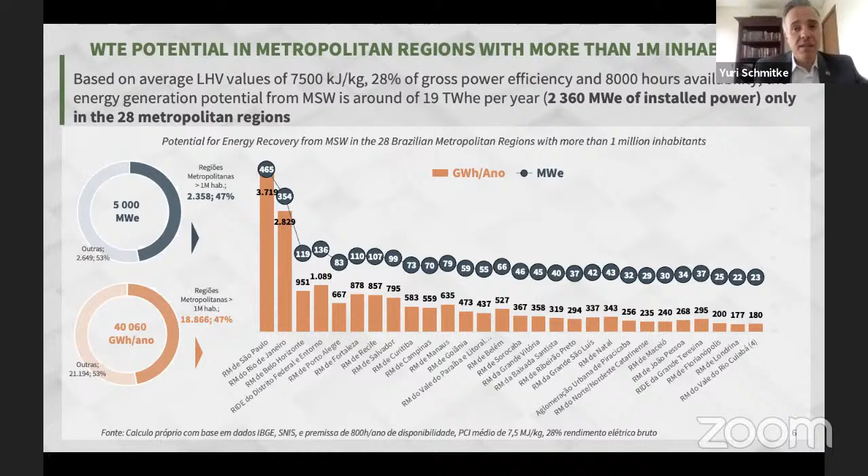If you consider the cities with more than 1 million inhabitants, the potential of waste-to-energy plants is around 19 terawatt-hours of electricity per year, that's 2,360 megawatts of installed power, only in the 28 metropolitan regions. If you consider the 600K inhabitants cities, you have this opportunity: 11.75 terawatt-hours per year.

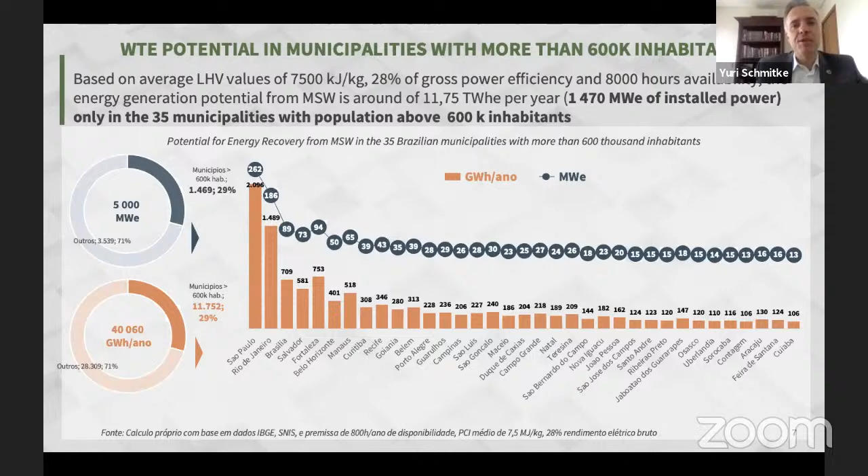And the summary is this: we can construct in Brazil about 118 waste-to-energy plants with 20 megawatts of electricity in 28 metropolitan regions with 1 million inhabitants, and 73 waste-to-energy plants in the 25 municipalities with more than 600K inhabitants.

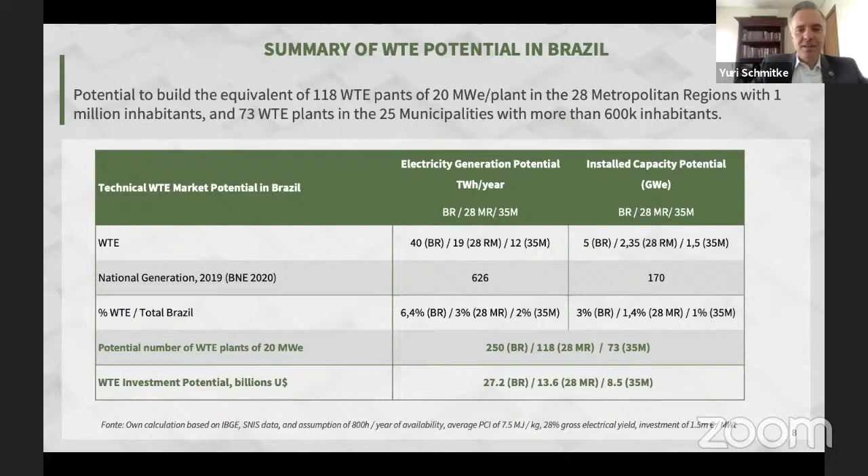Market drivers and challenges: the next step is the new framework for sanitation. As the ambassador said, this is obliging all municipalities to formalize public-private partnerships, PPPs, contracts for 30 years of concession. In the past, and nowadays, we have a lot of 5-year contracts. That's the reality in Brazil.

What can you invest in a 5-year contract? We don't have time to give the guarantees to the bank to have financing for good technologies, just a medium quality of landfills. Maybe you can have that with a 5-year contract, but with 30 years you can have good landfills when necessary. We can have waste-to-energy plants, recycling plants, refuse-derived fuel plants to produce for cement, and have this huge opportunity in Brazil with this new sanitary law that you obey.

If the municipality didn't make a PPP, it will be a crime in Brazil. And you have the chance to bid to have the guarantee with the water bill. I have a tariff inside the water bill, the gate fee, the price to treat the waste. And with that, we have a guarantee to give to the bank to have project finance.

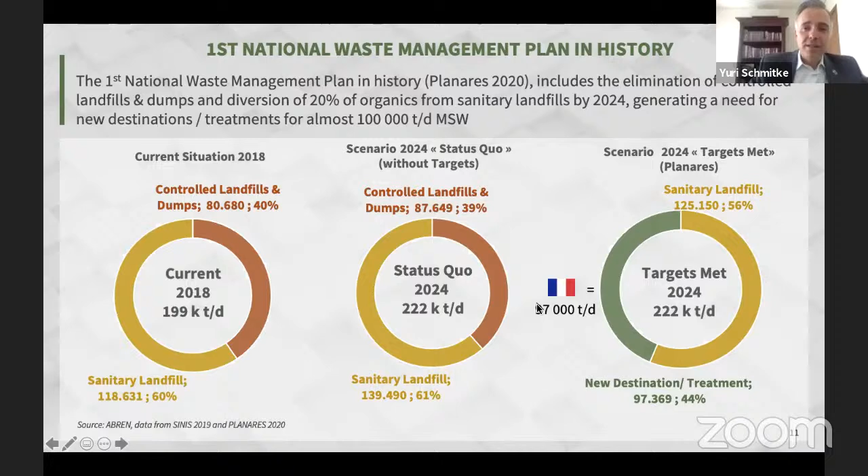And you have a huge opportunity for waste-to-energy in this plan. The Supreme Court banned the construction or extension of landfills in environmentally protected areas, resulting in the search for alternative treatments for 37,000 tons per day of municipal solid waste due to lack of new available areas.

That's in the news. Say the name of the cities: 12 of 28 landfills across 11 states, capitals located in protected areas. And the Supreme Court is now deciding if this new decision will force these landfills to stop operation, or only apply to the next landfill.

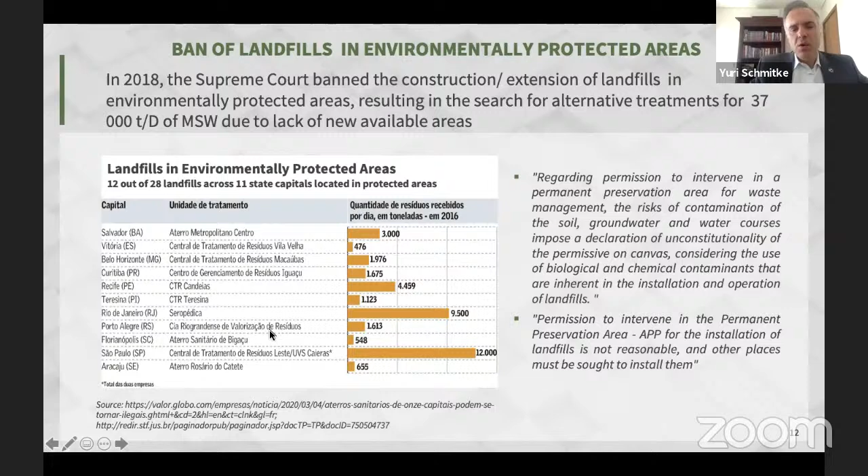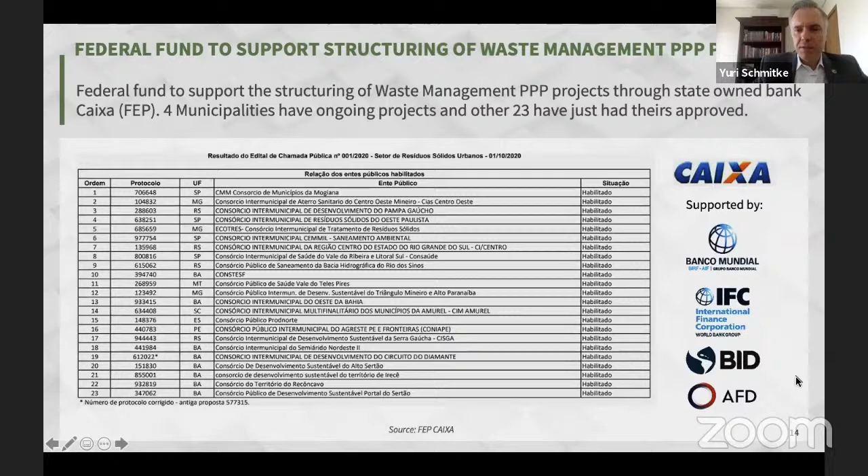Yuri, if I may interrupt you quickly, I think you're having a small problem with your audio. Please take care with your sound. Sorry to our audience also. Let's do one more test, please. Is it okay now? No, your voice is getting very distant. Sorry, I need to interrupt you, I think you're covering the microphone with your hand, maybe you're not noticing it. Can you try once again? Say 1, 2, 3.

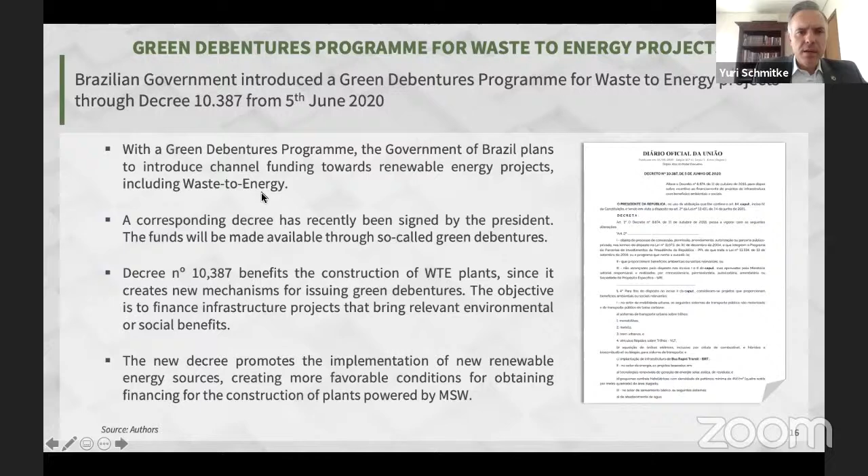I will be so fast. We have green debentures for the waste management plants also this year to the financial sector, and this is a historic low level of our inflation rates. Reduction of corporate tax at 34%. The project of law in our Congress aims to reduce that rate to 20 or 25%, and we have average import duties reducing for machine equipment to 0% rate, if you don't have the nationality for this machine or equipment.

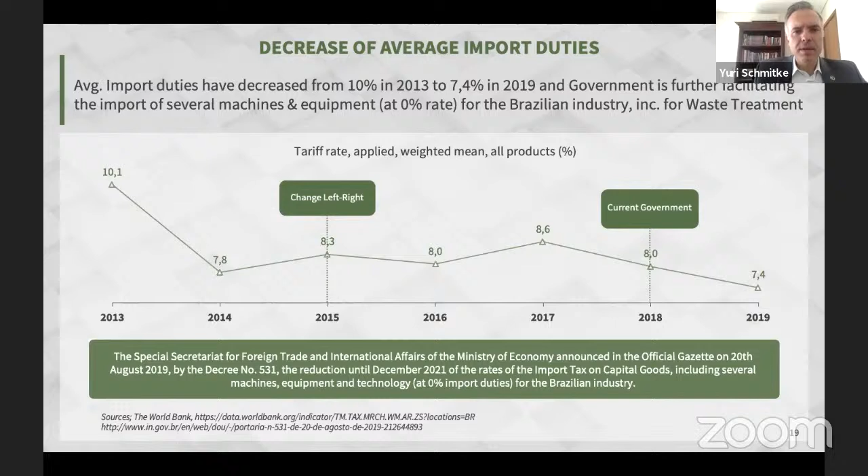And the good news: the Ministry of Energy and Mines is preparing an auction for waste to energy projects in 2021, and ABREN is contributing with the ministry to define appropriate power tariff levels to allow those waste to energy projects. As for market opportunities, we have 6 projects of waste to energy plants: 5 are incineration, and Diadema is gasification, of Outotec.

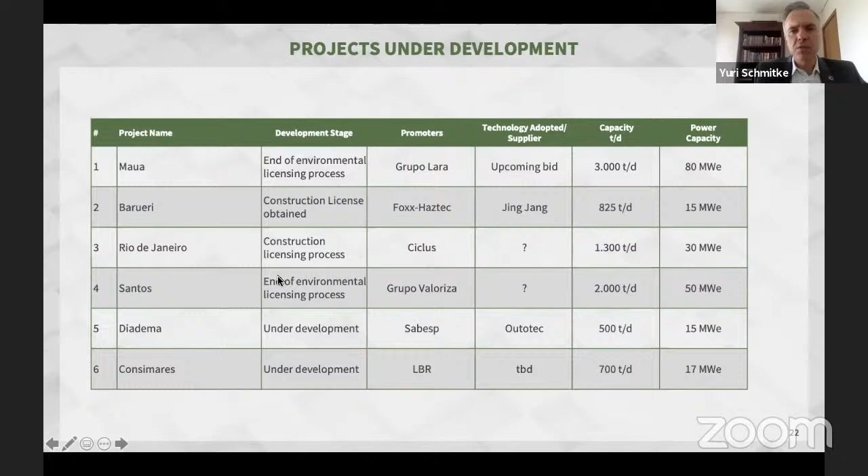And what ABREN is doing: we have a contribution to Planares, an MBA, the first waste treatment course in Brazil. We are developing a national guide of waste to energy. We made 40 webinars in 2020 this year, and we have a lot of publications in newspapers and magazines, every 2 weeks, large newspapers talking about the waste to energy market. Thank you very much.

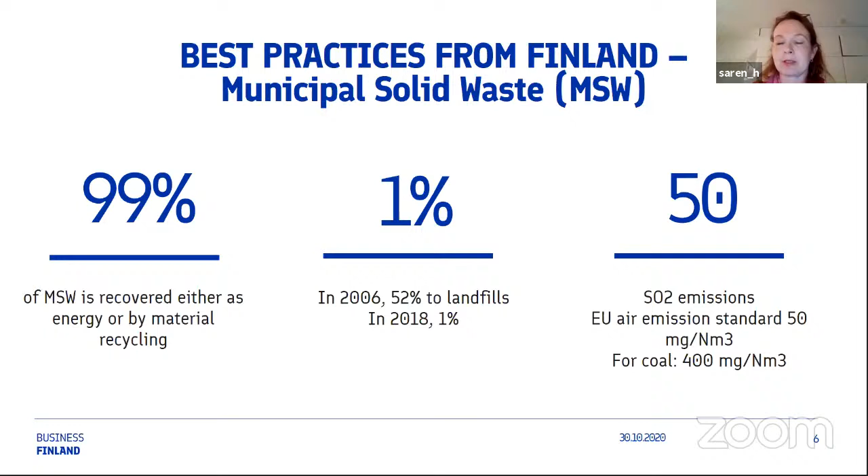What is the local situation in Brazil? Are we talking about new landfills, how to build them in an environmental way? Or are we talking about how to utilize the waste already there in the old landfills, and taking care of the old landfills, what to do with them? Are we talking about centralized solutions, or decentralized solutions?

We had a very interesting seminar the other week with Frost & Sullivan, a global player who provides market information and market reviews, and they called the 2020s the decade of decentralization. I think that's a very important, interesting development. We have to dig more into details about what it means in the end for the energy companies, for the consumers, for the utilities, and so forth.

Again, from this holistic point of view, understanding the picture, how much renewables you have, what is the case of the various bio raw materials, whether we're talking about forest, agro, or the industrial side and waste streams. Also in the picture we have wastewater and sludge, what to do with electronic waste, hazardous waste, construction waste, and very important nowadays is also the plastic issue, meaning river and ocean plastics, what to do with that.

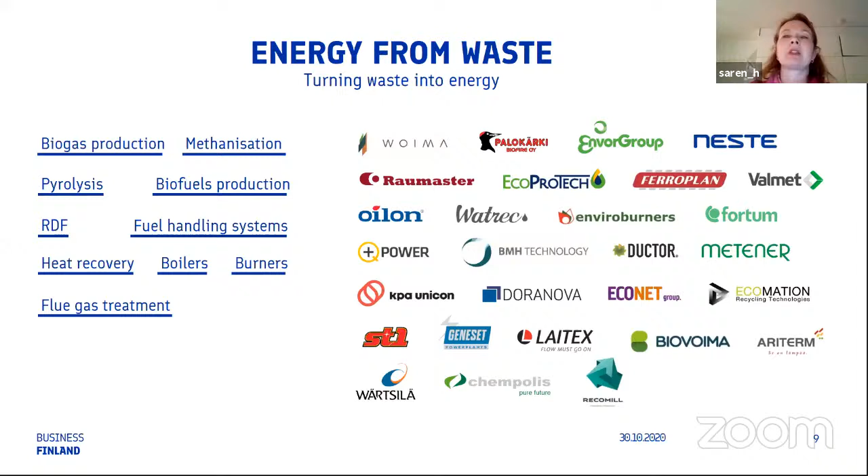Then going further to energy from waste, also companies related to that, heat recovery, flue gas treatments - these issues become more and more important as we need to be more sustainable and use all the materials we have at hand and recycle those. Last but not least, different kinds of services available, whether planning, research, or operating systems we have at hand.

At this stage I'd like to end my presentation, and hopefully there were some ideas, some food for thought, and we can discuss certain issues later. For instance, the smart and flexible grid, which isn't today's topic, but the grid is definitely needed in the end to provide electricity to end consumers and end clients. Thank you for your time and your interest, and I look forward to listening to the rest of the presentations and further discussions with the Brazilian counterparts. Thank you.

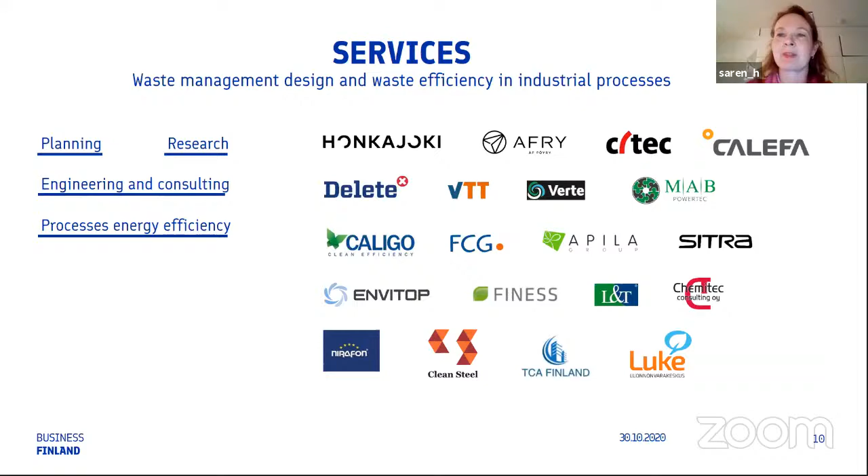Okay, thank you very much, Mrs. Sarén, it was a beautiful presentation. We're very excited to see great news regarding our climate change goals. We always see so much bad news, and it's great to see Finland with such a great 2035 goal of being carbon neutral through Finland's technologies, something we hope the rest of the world can achieve, and you can support that too.

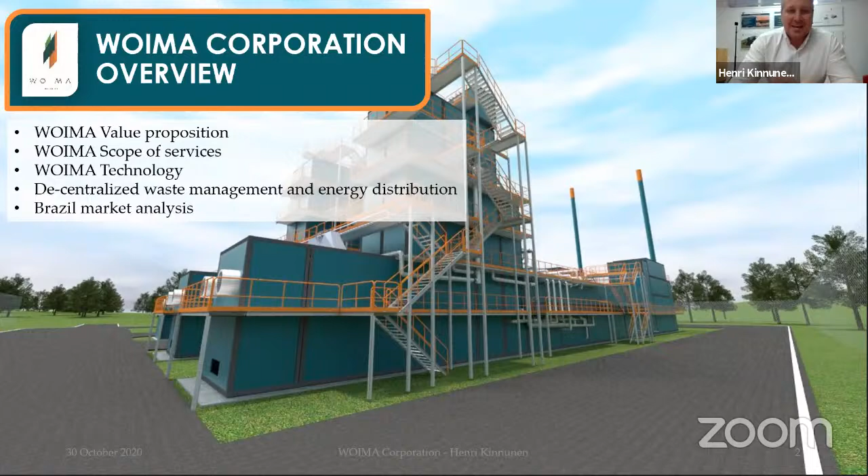My company is focusing on circular economy very much. What we want to do is significantly reduce waste landfilling, as is being done in Finland. With our solutions, we can provide several energy commodities. We can treat any type of waste, and we are strong boosters of recycling, as opposed to mass burning. So we want to add value to any type of waste, and through this decentralized model our aim is to cut down the logistics cost heavily.

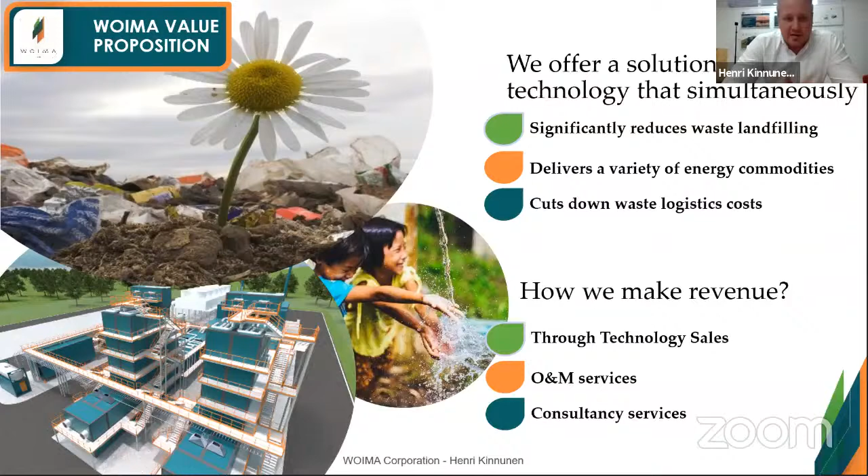We are an operator and a supplier of best-in-class circular economy solutions. Our main product is the one you see here in the picture, called WOIMA, a modular, prefabricated, standardized waste-to-energy power plant. So we are a technology sales company. We can also offer services to run such a plant, and many times we also provide services to our customers during the feasibility stage, so we do a little bit of consultancy service. But our main focus is that we want to sell these plants everywhere, and I will explain the difference compared to the many other companies we compete against.

Maybe this slide presents quite well what we are doing. We are very flexible, so we can be the full EPC company if there is a need from the customer, but many times we want to operate with the local company - that's why I mention civil versus utility connections, since it's often better that local companies handle that. Where we put most effort is what we call WOIMA technology EPC, where we deliver the whole plant, do the installation, ramp up, and then we can even run the plant on behalf of the customer. So it's a kind of full-service house.

I have some better slides about the ecosystem, and I think it's very much valid in the Brazilian context. We can also offer the full kind of solution, so this kind of pre-treatment facility we can also offer.

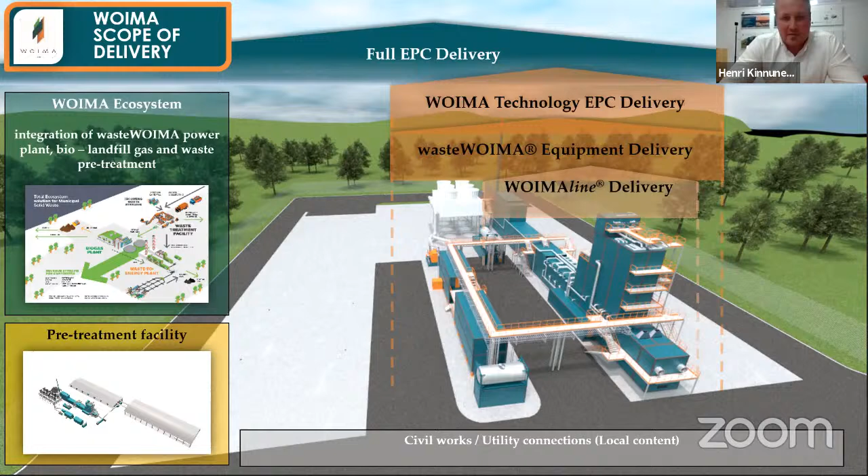The customer only needs to decide what they want to do with the steam. So 400 degrees, 40 bar comes from the line, and then it's up to the customer to decide if it's district heating, high pressure steam, a combination, and so forth. As I mentioned, we meet the local emission standards, even the strictest ones we have here in Finland. We collect the so-called APC ash and toxic ash, about 1 to 3%. So we promise that we can add value to more than 95% of the waste that comes into the plant, which is quite good.

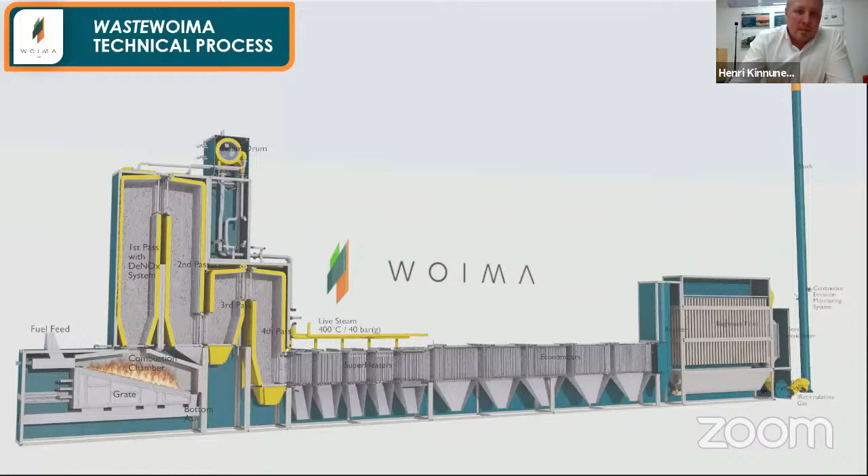Any type of waste, typically municipal solid waste. It can be already landfilled municipal solid waste as well, industrial waste, construction waste, even hazardous waste to some extent, biomedical waste. And what we receive a lot nowadays is this kind of ocean and river plastic waste, which is a good fuel for our plant.

Typical customers for us are waste management companies, companies who have access to waste for a long period of time, like Yuri mentioned, 5 to 20 years, because it's a must in this business. We work with energy companies who are interested in waste to energy and want to expand their plants. We work with private investors, developers, and renewable energy funds, because our concept is a standardized solution, which gives certain benefits for having multiple plants in such funds.

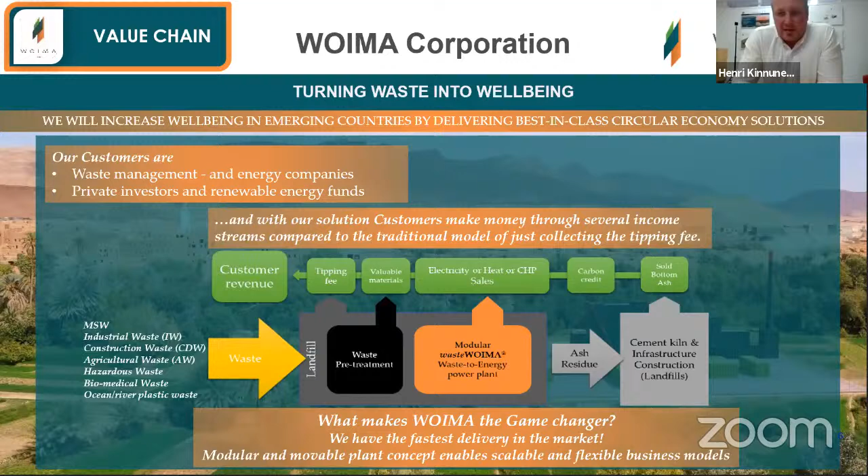This is the typical customer revenue stream. The customer gets money through the gate, the so-called tipping fee, and if there is waste pre-sorting, we boost that as much as possible, so we would at least do recycling for the metals and the glass. Then comes our plant, so it's either electricity or heat or a combination of those. And many times there are also carbon credits, if the customer can get those - I don't know if that's the case in Brazil. Then also the bottom ash is typically sold or given to cement kilns, or in many countries they make bricks out of that.

Some words about the wasteWOIMA concept. It's 100% scalable - in this picture you see 2 WOIMA lines. You can start with one if your waste amount is increasing, and then bring another line later. This is the leading idea of the whole system, so it's easy to scale. What we promise is 15 months from signing the contract, you have the plant up and running in your backyard.

What is very different from many competitors is that you can actually relocate the plant, which gives certain business prospects. You can have an existing landfill, bring the WOIMA plant next to it, start mining, and after 5 to 10 years, depending on how big the landfill is, you relocate the plant. This also gives you certain security if your customer is not paying the bill - let's say they don't pay for the electricity or the waste, so you can actually move the plant after that.

We don't aim for the big plants, so we are the small to medium scale power plants, which I'll show you later in terms of size. We do accept almost all wastes as fuels to our plant. I think in Brazil you have a big country, but in many of these big cities you don't have too much space. So the smallest plant we have can fit into 3,500 square meters, which is pretty good, and it can be next to an existing landfill already.

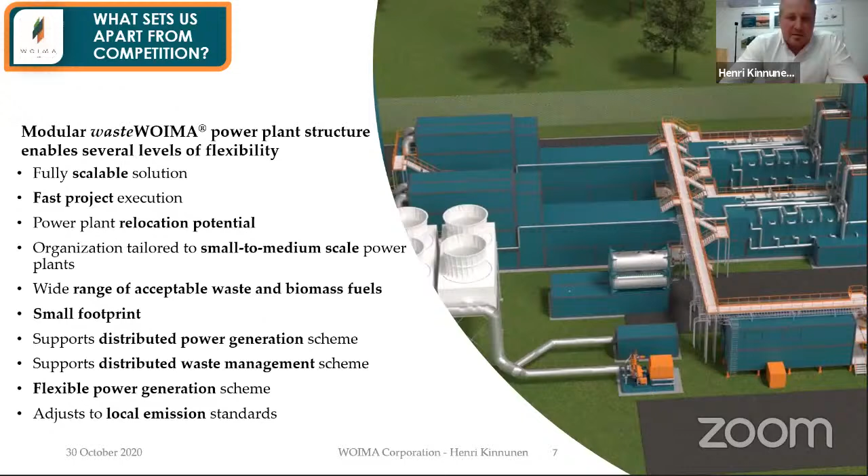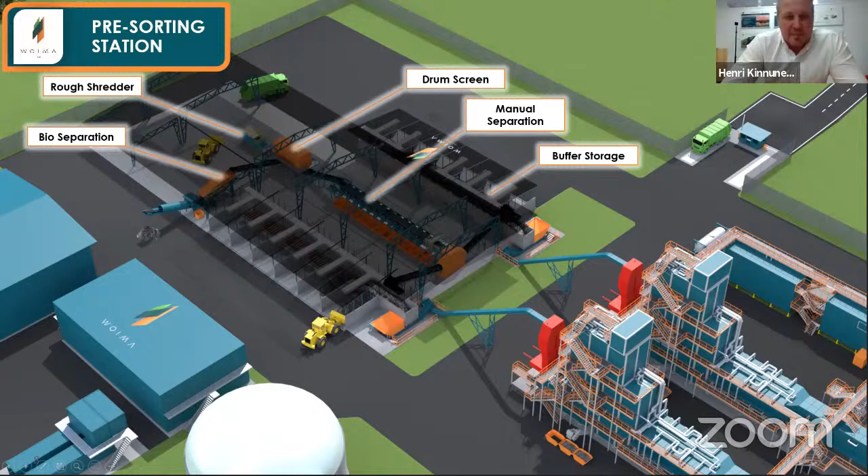As I mentioned, we can also provide this pre-sorting station. We have many good Finnish companies like Metso, for example - there can be a Metso shredder here and a simple manual separation line. Then we are boosting this kind of recycling method, circular economy, as much as possible, because we do accept almost any type of waste. So we know what type of fuel is coming to us, and we can also integrate this into our system.

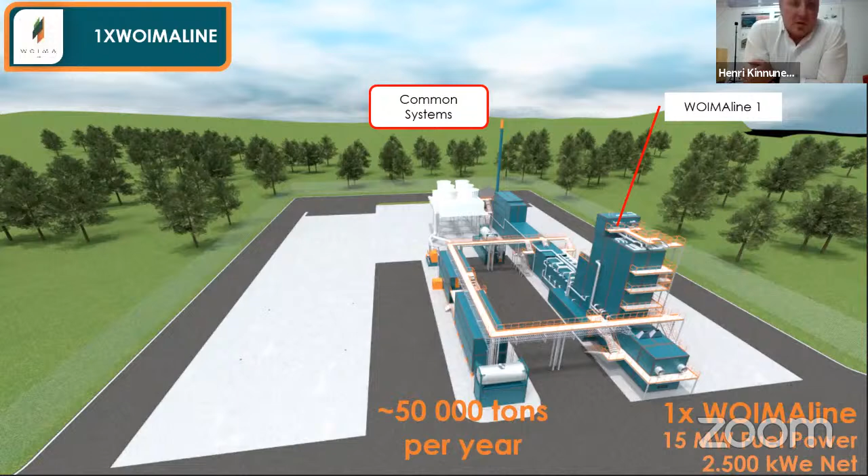A little bit more detail about the scope of what we do. Here you see one WOIMA line solution, around 50,000 tons per year, 15 megawatt fuel power per line, 2.5 to 2.7 net electricity to the grid. If you start with one line, you can add another line later and it will be 100% the same - you can run different fuels, or you can run the same fuels with 2 lines.

So this is something that separates us from many others - we are selling the same product in every single market where we are present.

Then I mentioned a bit about the ecosystem. What customers really want is an ultimate solution, someone who will give them the total solution. So that was the reason why we started to develop this WOIMA ecosystem.

It can be an existing landfill or a greenfield, and there's a waste treatment facility. In many countries, the waste coming into these landfills can be quite bad quality and varies a lot. For example, in Brazil, during the rainy season the humidity of the waste can be pretty high. With this method, we separate organics, either into a composting plant or a biogas plant, so we know the waste that comes to our plant will be good quality. This is how we secure the waste and reduce the seasonal variation as well.

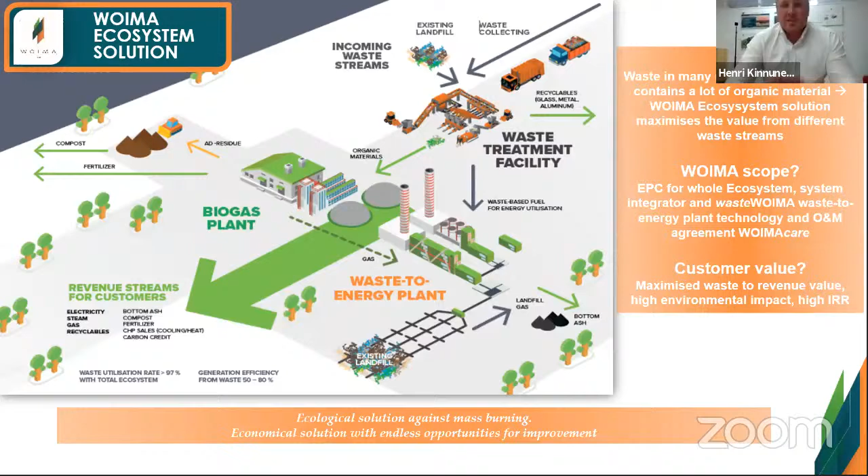What we've developed a lot is that we can also take the landfill gas and the biogas directly into our system, so we can increase the amount of electricity from such a plant. This is something we can also offer. Here you see a better picture of that. The smallest plant of this WOIMA ecosystem starts from 250 tons per day, but we can upscale this easily up to 2,000 tons per day, so there we start to be already in the bigger scale of plant.

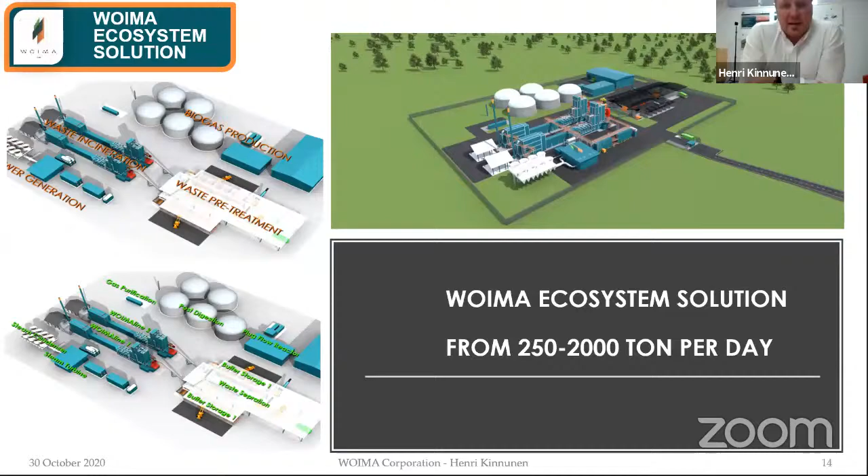Then I promised to give you a little information about decentralized waste management and energy distribution. We did a nice study for the city of Nairobi roughly a year ago, comparing a centralized big waste-to-energy plant versus having several smaller plants in the city of Nairobi, and the results were quite astonishing. Many of these results I'm sharing here are based on real facts. Such a study is comparable quite nicely to almost any big city like Rio or Sao Paulo.

By having this kind of decentralized waste management facilities close to the waste, the waste management or waste logistics costs are reduced up to 50%. I have in the next slide some actual figures from Nairobi as well. The electricity transmission losses diminish up to 10% because end users are close. You can do private PPAs, you can have mini grids, and this promotes quite well new opportunities like having batteries, etc. So it's endless opportunities for optimization.

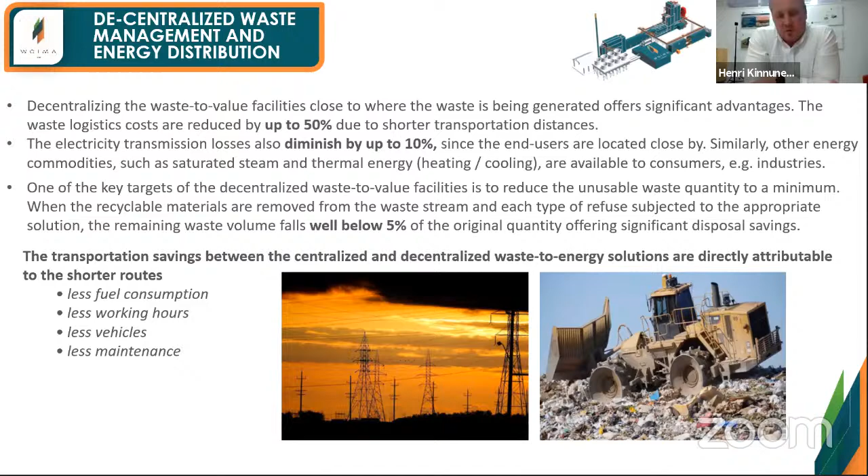The transport savings between centralized and decentralized waste-to-energy solutions come from the shorter routes. The end result is less fuel consumption, you can have fewer trucks, less working hours, and less maintenance. So there are direct savings for the municipality or whoever company is doing the waste collection.

It's not only a financially sound solution—as we say in Finland, we want to boost this circular economy as much as possible. There are other tangible and intangible benefits too, like increased recycling, higher waste collection, more flexibility in waste collection and transportation. We are reducing water, land, and air pollution as much as possible, and also there are positive health implications. So we are boosting this kind of smaller, cost-efficient waste energy facility like the Woima plant.

This can also be tested at a smaller scale. What the customer doesn't need to do is invest in a heavy 100 million euro plant. They can start with a smaller plant, and then when they see that the concept is working, we increase the size. So it's very efficient, very flexible.

The Woima plant has a very small footprint, a modular structure, and a very high level of prefabrication, as every single module comes in a 20 to 40 foot container size. So in practice, we can deliver these plants, for example in Brazil, anywhere you want, from the nearest port to the site. Because it's already designed, every single plant will be more or less the same, so you will save money on design and engineering.

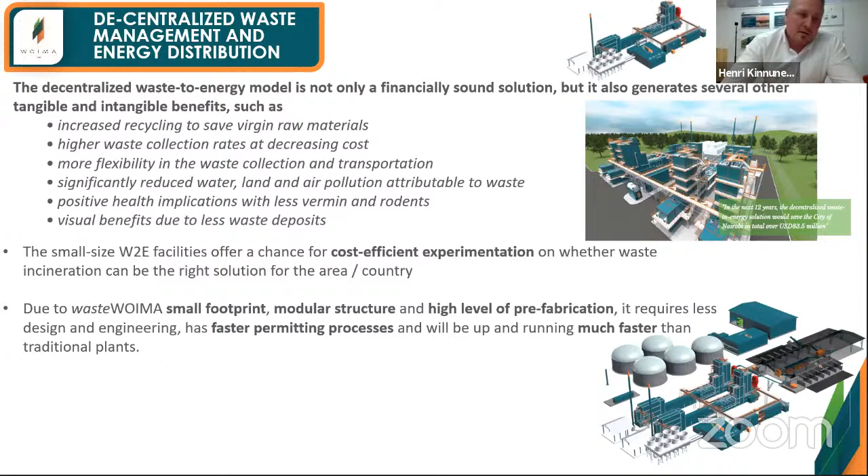Here I mentioned that through that study we did for Nairobi, over a 12 year period they saved more than $83.5 million only for logistics. With this money, they could already buy more or less 4 plants, so the savings are significant. I think this is actually exactly the case for Brazil as well.

Because many of the things that ABREN is now boosting will have a significant impact on how the waste will be treated, what the implications are, and what you need to do for the waste, creating not only health benefits for the country, but many business opportunities.

Our view is that Brazil has a great future not only in the waste-to-energy sector, but in the context of circular economy, because there are a lot of landfills where the existing landfill space can be used, and a lot of waste that can be treated. If you do things right, there will also be green energy to share for everyone.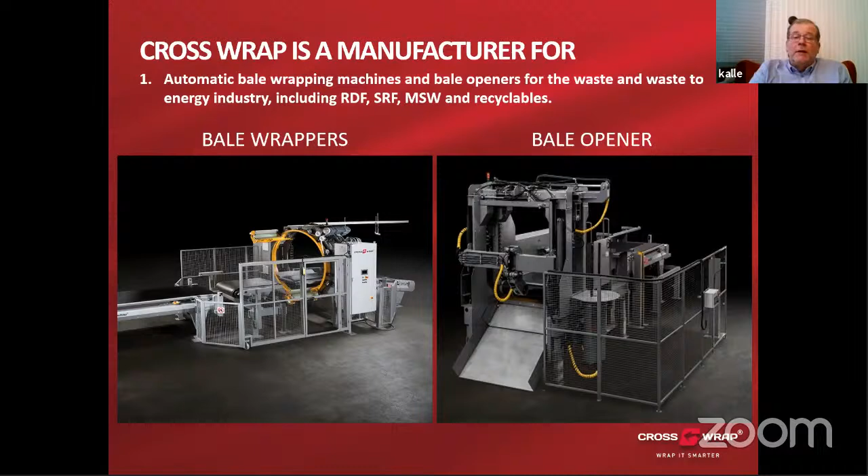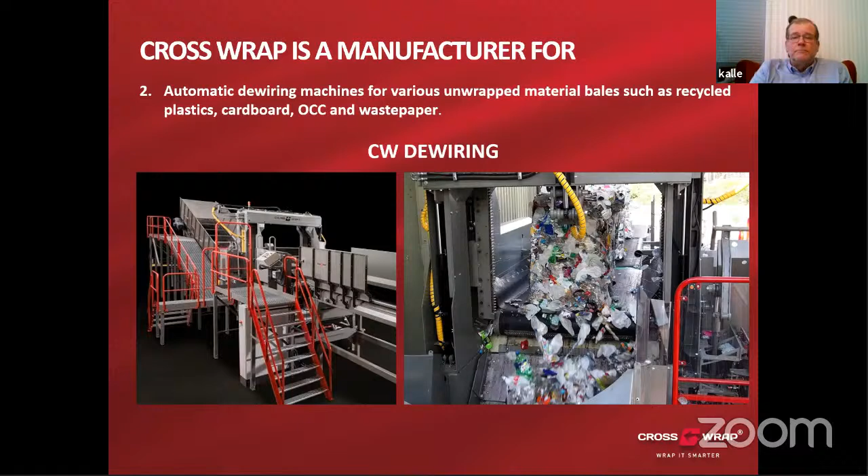So the concept is that whatever the system is in the front—you separate the materials, or it's municipal solid waste—there will be a baler, and then we wrap it, meaning we save the energy from that first step. Whether it's SRF, RDF, or municipal solid waste, it's pressed and wrapped tight, and when it's pressed and wrapped tight, the energy value remains.

So then it's stored, transported, stored short or long time. Long time means dry landfill, and short time means direct by truck to where the energy will be used. On the other end, we have a bale opener so we can open up the bales, and the material follows into the process—we can take the ties and films out if needed, or throw them in, depending on whether you have mass burning, fluidized bed, or a cement kiln.

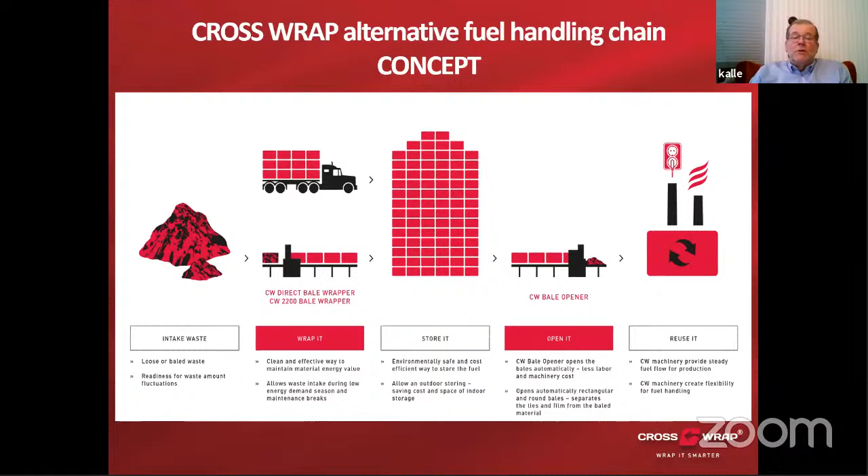About the machinery, we have been in business—I started the company in '94, and in '95 we did the first waste project in Germany. We moved that landfill there, baled and wrapped it, and it was shipped to be used as waste to energy. It was like landfill mining.

Next one is in Brazil, RDF. The material is first sorted—valuables away, organics away—so then it's burnables, which can be landfilled like dry landfill or used for fuel.

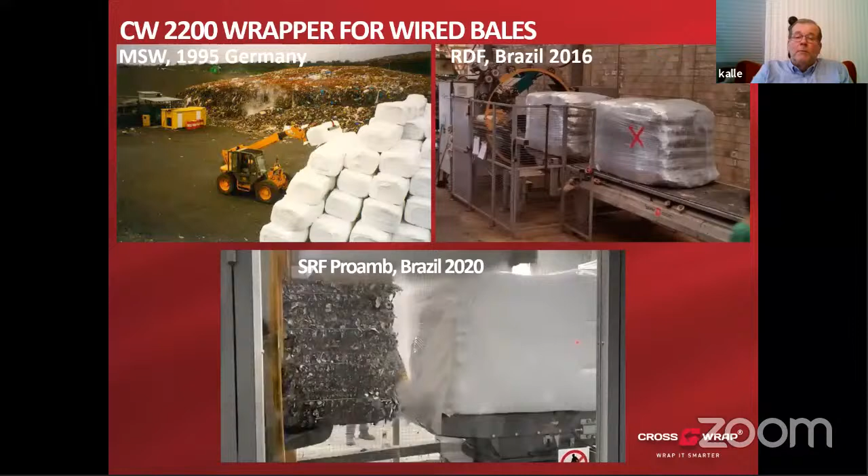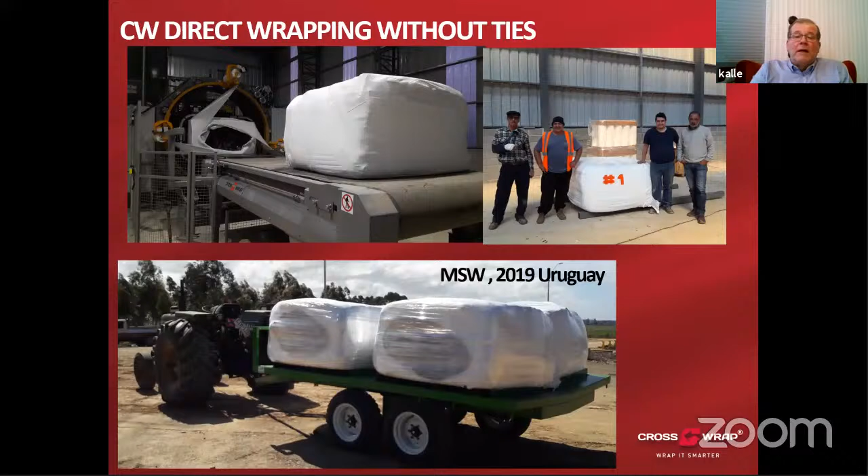The third one here for this CW 2200 wrapper is for Proamb in Brazil. On the left side is SRF, and we're finishing that as wrapped bales. The CW 2200 is a wrapper which works behind the balers, tying the bale first, and then we wrap it. We also have a solution, CW Direct, which wraps after twin ram balers without any ties. This is an example from Uruguay, where they are baling and wrapping municipal solid waste, which goes to landfill as dry landfill and can be used for fuel later on. The whole idea behind both systems is that the energy value remains.

That's about transporting those bales, like in Brazil - I've seen quite many flatbeds for that. This left side picture is from New York, actually Long Island, where they are shipping the material to landfills. Beautiful material to be used for fuel, but the US guys think you can stock that for 100 years or maybe 20 years, but it will be taken for fuel, I'm sure, later on.

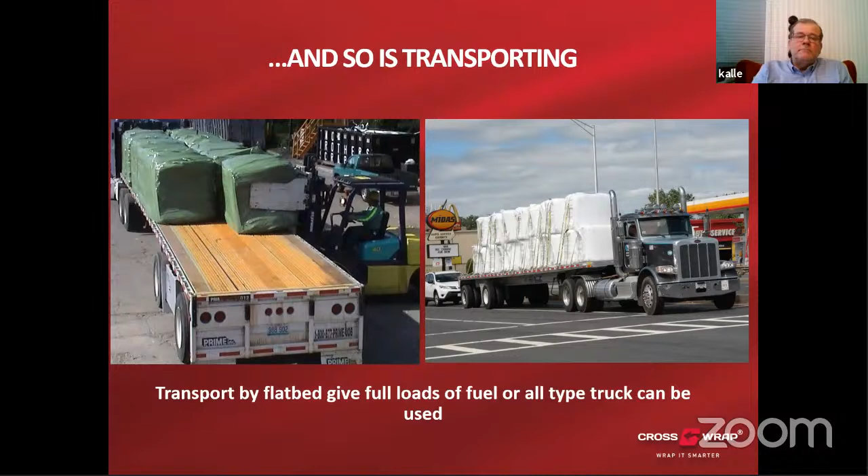I picked up some US examples here - this is New Jersey. These guys have a plant that does about 2,000 tons per day, shipping that to a landfill in the Midwest by rail. They have 100 tons per rail car, no smell, no flies. In their case, they don't care about the energy value, but it remains, and it can be used later on.

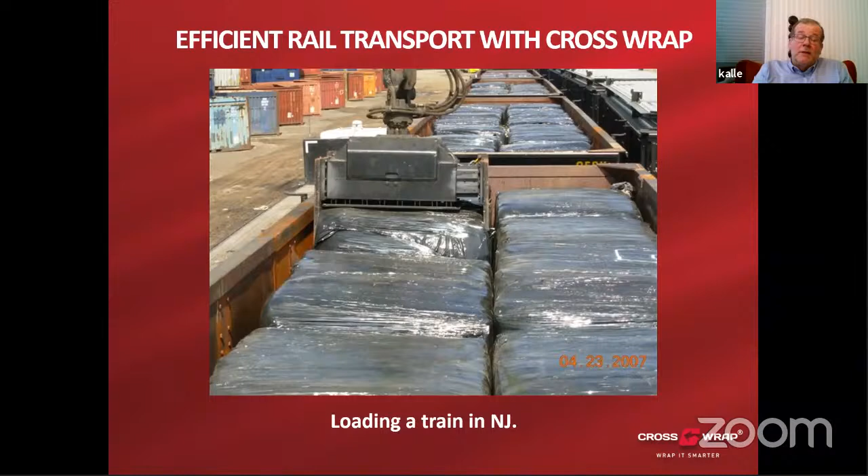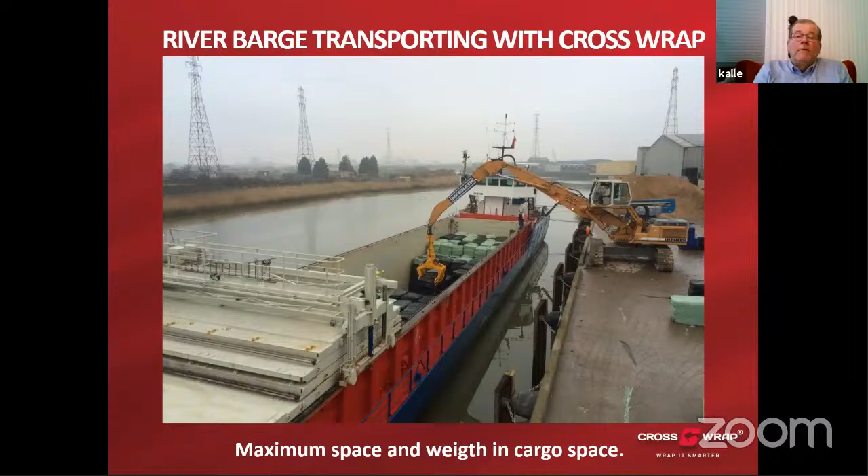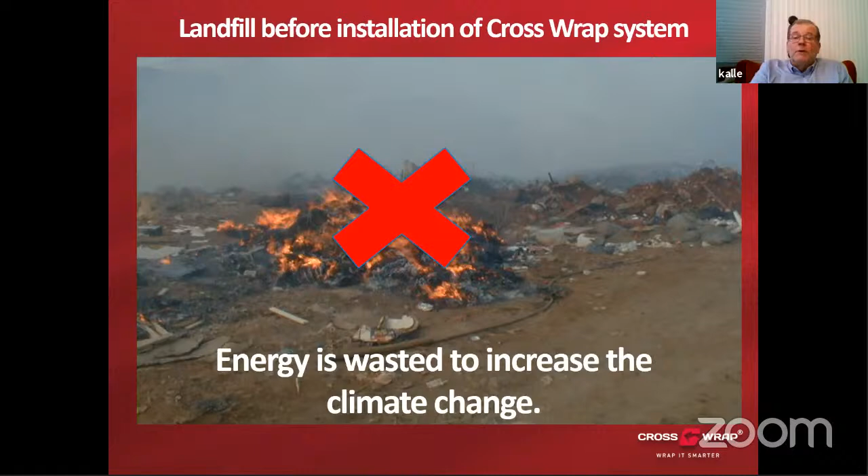So that was the handling, but here's a landfill. This was actually taken by our engineers when they went to install a wrapping machine at this site. This is a typical landfill, unfortunately, even today in many cases - whatever the country, South America or even in the EU, though this was in the 90s - they burn the waste, maybe illegal dumping or even legal dumping, but that's how they get rid of the waste. As it is, it's wasting the energy and increasing climate change, which is a poor thing we don't like, but it happens today.

This is a little bit better, but we still see birds, flies, and flying materials. At the same time you don't see fire, but the energy value doesn't remain in this material, and it's costing these open-top landfills, which are very typical. They still create big problems for us in climate change. This is something we do not recommend, and we've seen more and more of these being closed because of the problems they cause for our Earth.

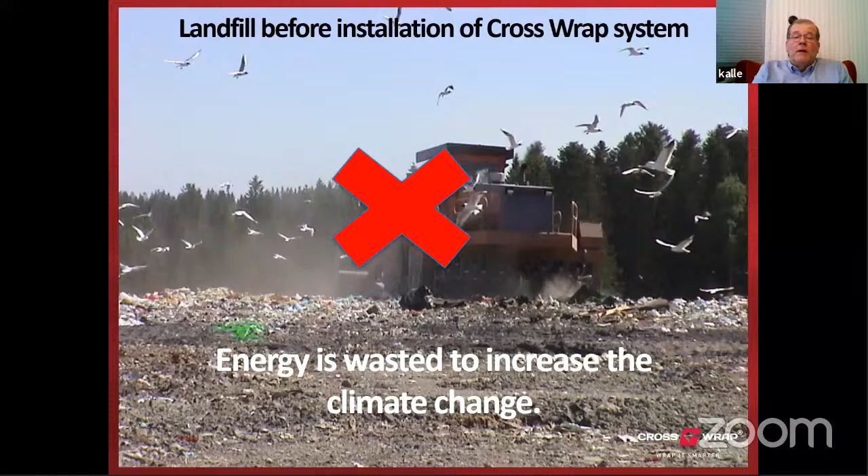This is then a dry landfill where it's easy and nice compacting. You just need a material handler, and then you put the bales in a stack, and then you put a little sand over, and then you can drive again there. But the beauty is that the energy value remains a lot in this case.

And it will be picked up later on for what they call landfill mining, but the material will stay clean. Even though they call this dry landfill, we call it just temporary or long time storage. It's a solution for when it's needed on long time storage, like in Brazil, where they won't have the money to do all the investments for the energy plants in a first step. This is one step forward, and it's a big step for stopping climate change.

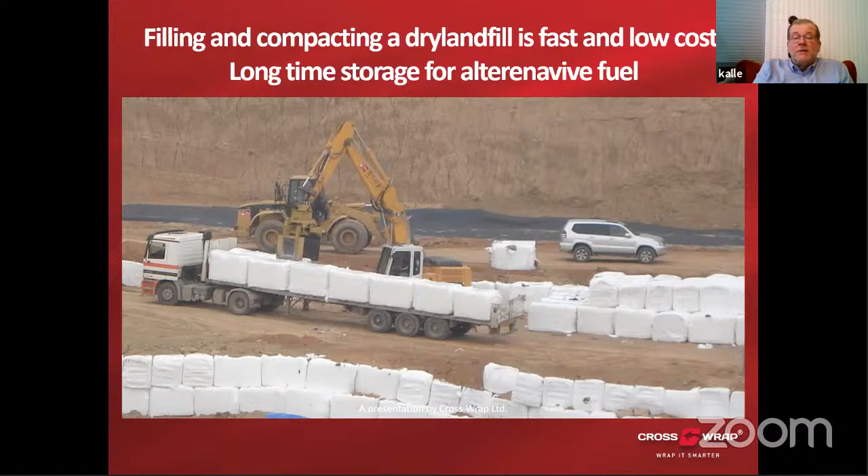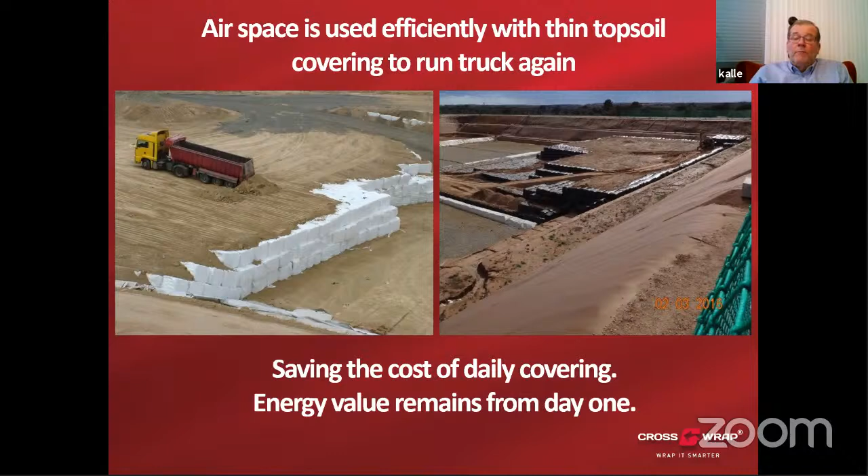This just shows an example, on the left-hand side, in Spain. After they put layers of alternative fuels on the ground, they put a little bit of sand over that and you can drive again. On the right-hand side, it's from France, same thing, and the energy value remains from day one. This is from the transfer station or the waste handling site. From there, the material will remain with the energy value.

Just another picture from the dry landfill. As you can see, there's no birds, there's no flies. And the big deal is that today, for a normal landfill, one of the biggest costs is cleaning up the leachate, if that's done right.

In a dry landfill, you get a lot less leachate. It's basically rainwater, but the rainwater doesn't go through the materials, meaning the leachate is so much cleaner. Cleaning that up is a lot less money, and it makes a big cost savings.

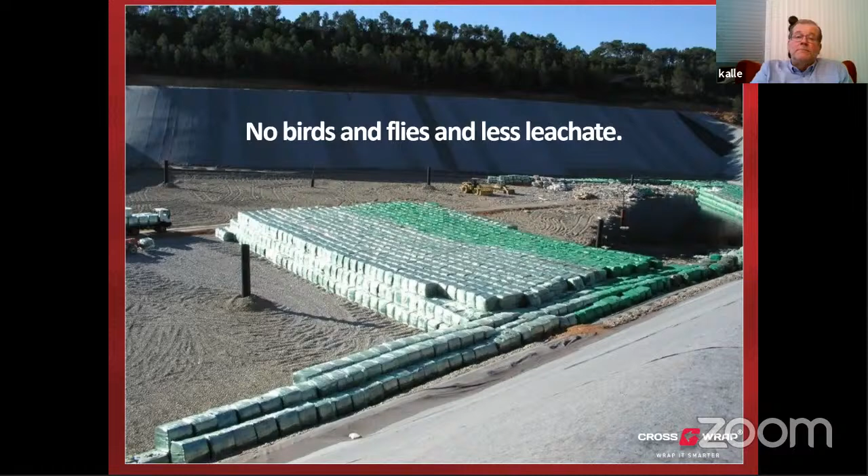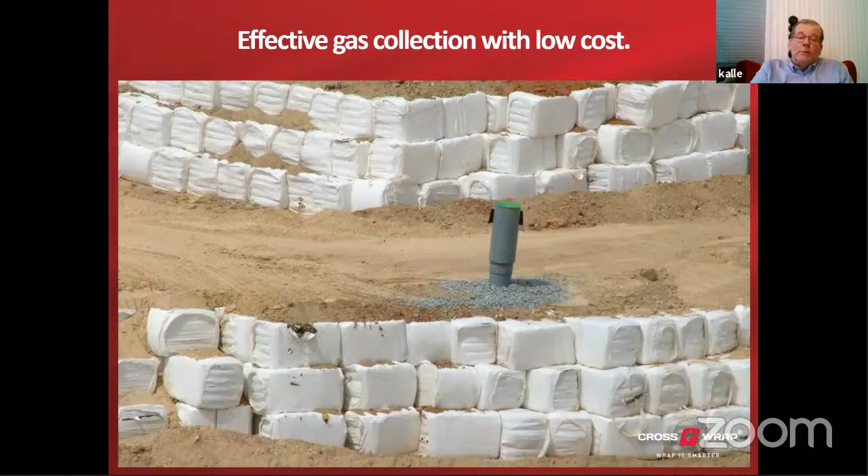This is just showing the tube there for gas collection, there's a little bit of gas coming out, and that can be collected easily, which again is protecting the environment.

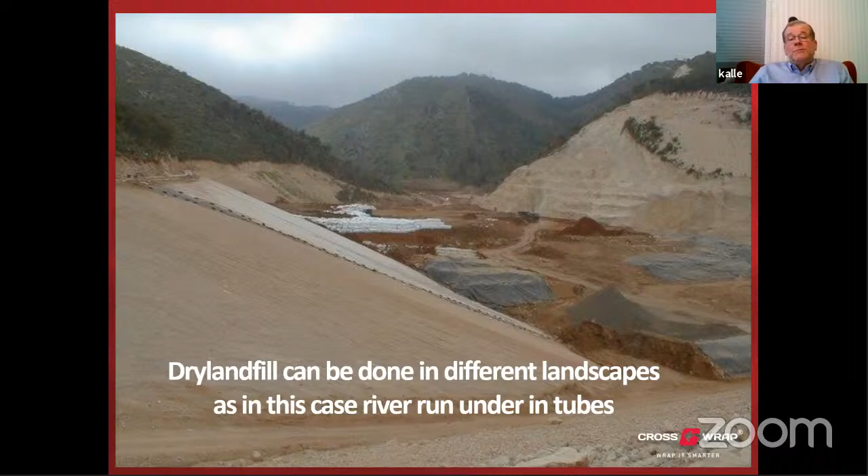So all this is filled up, and there's a river underneath, which is in a tube. Beirut is nearby, but they didn't have any place to make the landfill, and this was the solution. When we started the project, there was one waste-to-energy plant, but the locals burnt it down, and ever since they haven't had waste-to-energy, so this material is just waiting for use later on.

Okay, then we jump to the use of the material. This is an example from Germany where Suez has a plant that has a contract with the locals where they take waste 12 months per year, but at the same time the site is in maintenance once in a while, and then you have peaks where there's more waste than they can handle.

So in the same building, they have baling and wrapping. They have a license to stock that outside. And when they are low on waste, they will use this energy from those bales on the side, meaning they can always run with high performance for the plant.

This is an example from Mexico City, where there's sorting in the city. Actually, it's near an airport, where they have a couple of our wrappers working. And then it's shipped to Cemex to be used for fuel. It's a nice, neat operation. It's just not ending up in a landfill anymore.

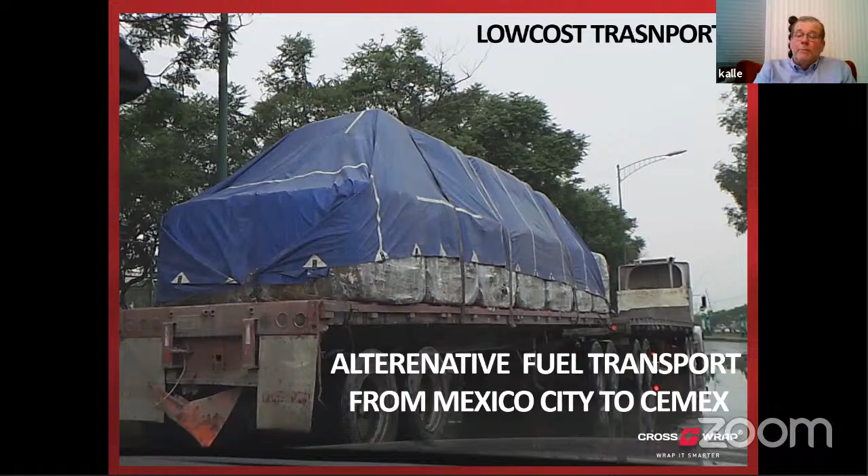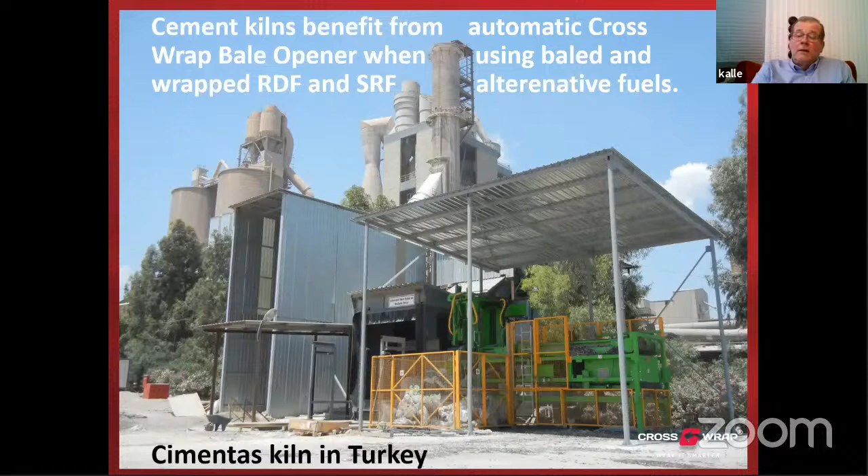This is a project in Turkey, where we have a couple of those wrappers. We have a few wrappers and a couple of dewiring systems, bale openers working for a cement kiln that they can use as fuel. This is the InterCement.

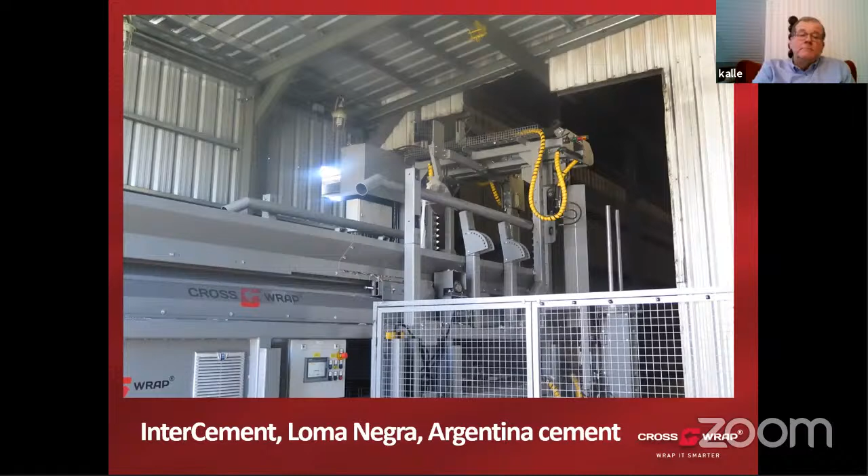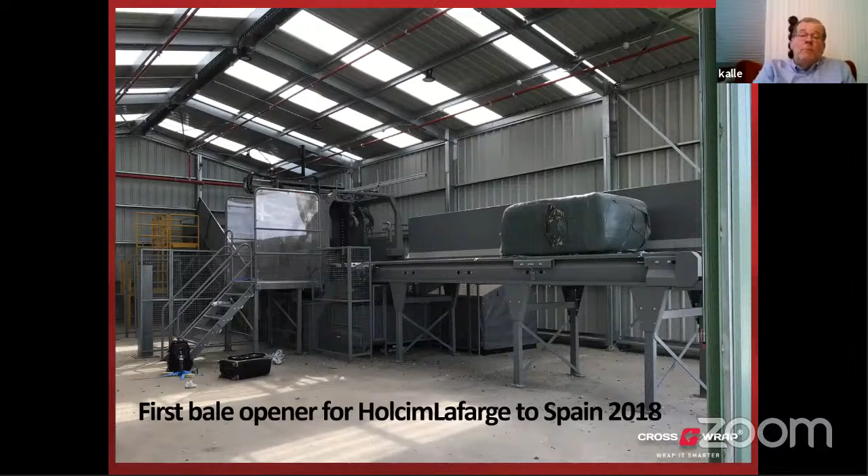Just an example from South America, nearest to Brazil. This is Loma Negra, where they are receiving SRF in wrapped bales. This site is the first bale opener in Spain, and it's Holcim Lafarge, Spain. Why I'm saying first, because they have already ordered the second one for another cement kiln in Spain. They take most of the materials locally, but there's quite a lot coming from like the UK or Ireland.

This is Titan Cement in Greece. On the left-hand side, you see the bale going in, and on the right-hand side, we are pulling the film and ties out. And then it goes to the process to be used as fuel. We did replace another machine here because they wanted more capacity and reliability for the system, and they're very happy today with this one.

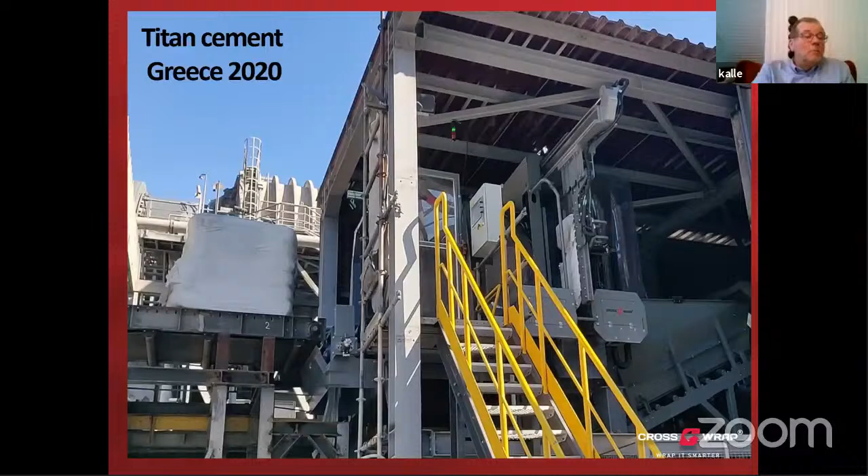That's kind of... it's not our part of the business. Our part is to make the logistics, and you make your solutions to save the Earth, I mean.

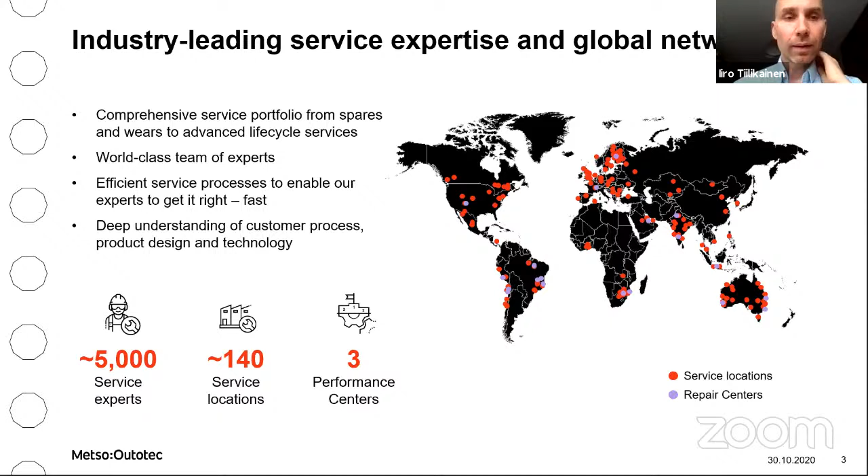So I don't want to speak here alone with the audience listening to me. So yes, as I said, we're a global company. We are present in every mining country, basically in one way or another, and in countries where we don't have offices directly, we typically have agents. But as you can see in Brazil, we have several locations there. Our technology is based on fluidized bed, so it's this sand-like material where the waste, or the fuel, is put in. We have 60 years of commercial use behind this technology, so we really know how it performs and what it can do.

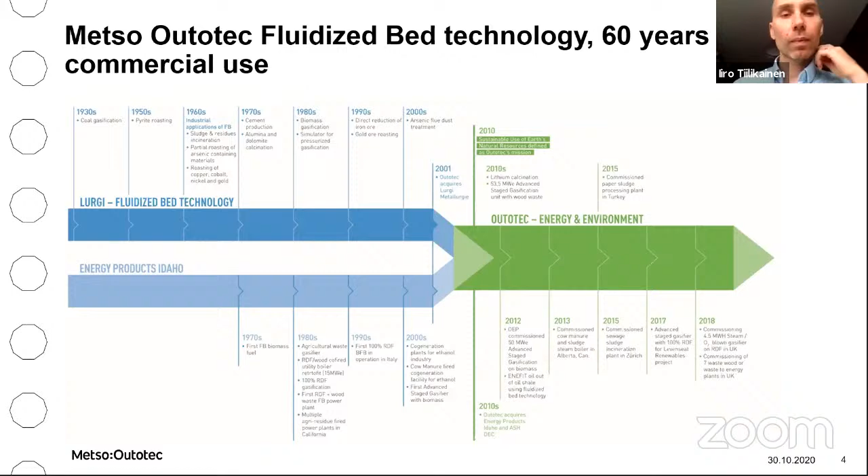I think it's fair to say that Brazil has a waste challenge. There's a lot of waste. It's not always disposed of the right way, and the recycling industry is not the healthiest at the moment. So we would like to promote a solution that helps take this to the next level and be safer for everybody in this industry and all the people living in the country.

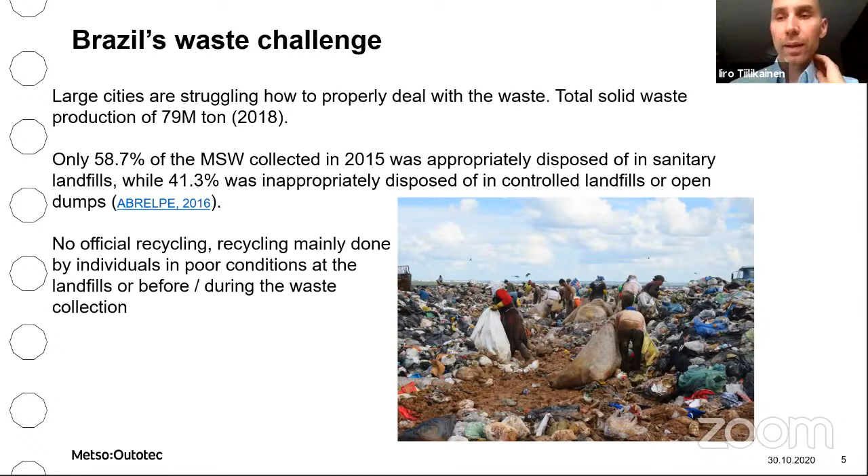The traditional mass burn route is that everything is collected together and just burned. This is not the solution we promote, because there are several areas that are not ideal for society. It means you need to build a massive waste-to-energy plant for all that tonnage. The efficiency of the plant is relatively low because a lot of that material doesn't belong in an energy plant. You're putting stuff through that doesn't burn, like metal, stones, glass, and these come out of the plant. So you have a high amount of material coming out of the system that you need to process and dispose of, which is a waste of time and effort.

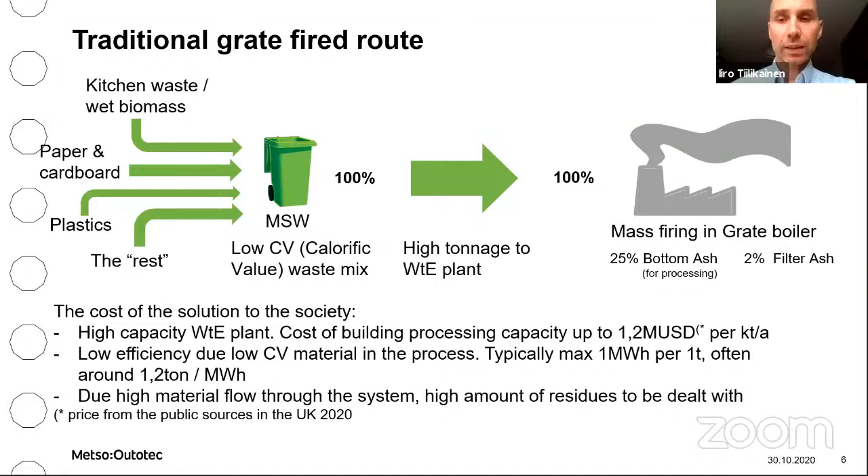Now the solution we'd like to see implemented is that waste is ideally collected separately, but if that's not possible, you collect everything and have a material recovery facility where metals, glass, and especially bio-waste and biomass are separated from the rest. The biomass goes to an anaerobic digestion plant, which generates biogas that can replace natural gas if you have a gas distribution network available. If not, you can use a gas engine to produce electricity from it. The rest is dealt with by a high efficiency waste-to-energy plant and turned into electricity and heat.

So the benefit for society or the municipality is that the waste-to-energy plant can be lower capacity. The specific cost can be lower and efficiency higher because the material mix is more suitable for a plant like this. A big portion of the material goes to the anaerobic digestion plant, which is cheap, easy, and fast to build—ideal for reducing your capital expenditure compared to the throughput you're handling.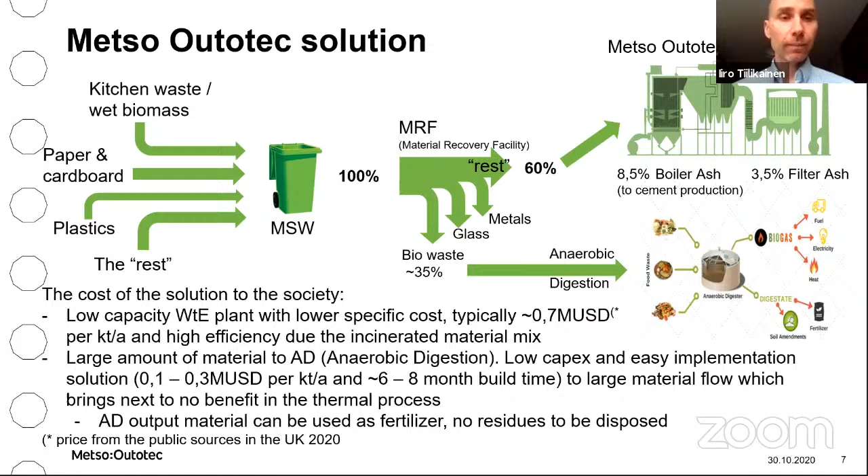Now that all sounds nice, but of course there are benefits and drawbacks to everything, so just being open on the good and the bad. What we can do—and here we separate from Mr. Kinnunen's technology and presentation—is that our system is also modular, but made of much bigger modules, and we can have up to 350,000 tons a year, which is roughly 1,000 tons a day, if you prefer those figures.

This higher capacity can also lead to lower capex cost, and higher efficiency, definitely, because the wet biomass that wouldn't actually produce much energy in the system doesn't go through this system—it goes through the AD plant instead.

It allows more recycling and material reuse. In the picture you see here, there's a recycling line in the front. Then you have two storage silos where the prepared fuel is stored, with 2.5 days worth of storage. And then you have the Outotec waste-to-energy line.

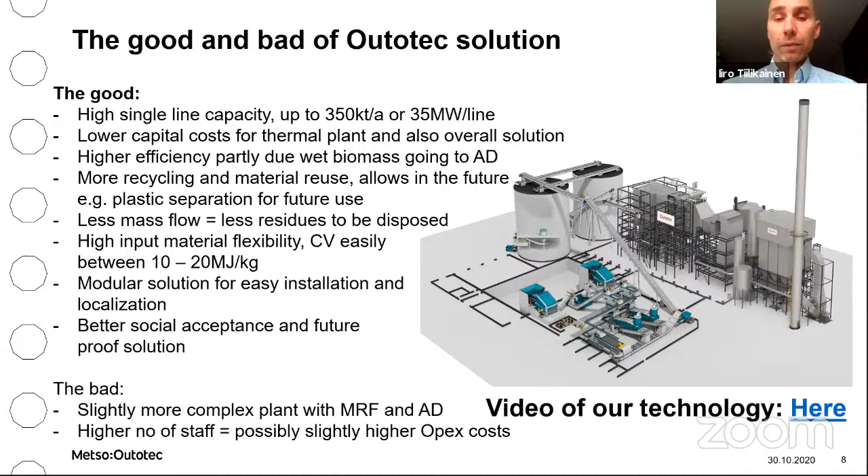The better the plant, the lower the emissions, the easier the social acceptance from local people with a plant like this. Now the drawbacks of our plant are not much, but compared to these mass burn plants, the plant is a bit more complex because there's this material recycling facility step, and someone needs to operate that, so you need a few more persons. But in our opinion, those drawbacks are small compared to the benefits of the technology.

Like I said, emissions are really key when it comes to social acceptance. Here are test results from one of our waste-to-energy plants from a few weeks back when it was performance tested, so these are actual values. You can see 2-week emission test values, and this plant got permitted in 2015, where the permit limits in the EU were still higher than they are currently. The lowest line shows the current permitting levels.

There is only one value where our technology misses the new values, and you need to remember this technology at the time was designed to meet the higher 2015 values. So even our 2015 design is meeting practically all of the 2020 requirements. This one value where we are not meeting the limit is something where we can easily increase the flow of hydrated lime and get that value well below the limit of 6. So this just shows how with our technology we are really, in many values, at 1/10 of the limit or even lower.

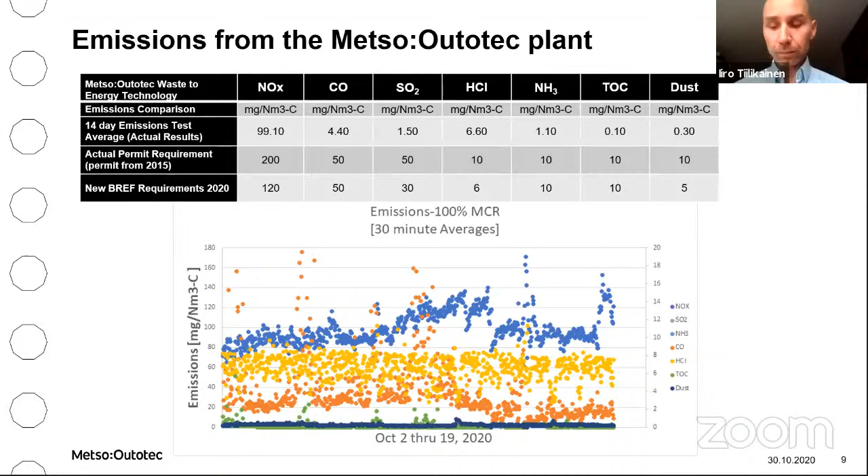We have done around 120 of these plants since we started doing them in the 1970s, so there's a lot of experience in the company on various fuels, and a lot of fuel flexibility. We have customers running the plants with agricultural waste, and depending on the harvesting season, they might use 4 or 5 different fuels during one year. First they use corn residues, then they might use almond shells for the next 2 months, and so on.

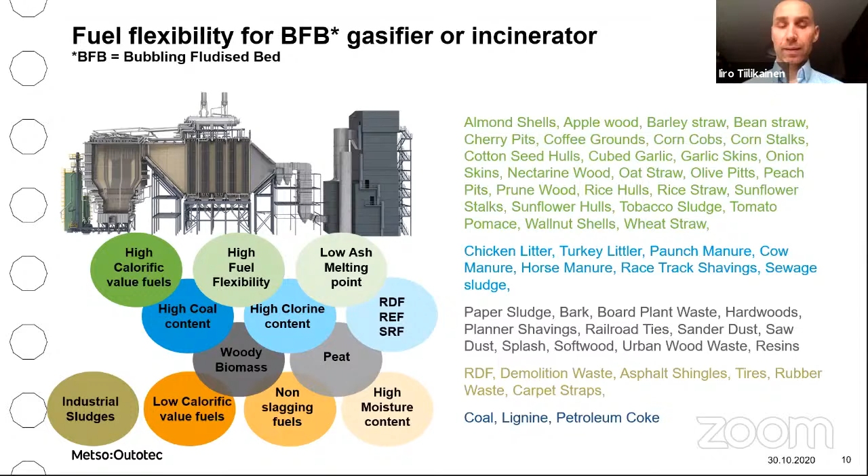That's really a great thing for the technology, and also good when we're talking about waste-originated fuels, where moisture levels might vary depending on the season, and the content of the waste might go one way or the other in the years to come. You don't want your technology to be struggling when your input changes, so that's something where we are secure that we can do a plant that works for the years to come.

Here's some good and bad still on the grate-fired or mass burn plant. The good is that you don't need pre-treatment, you just push everything in, and you might have potentially lower OPEX. But the bad is that it's not fuel flexible, it can't handle high calorific value fuels or wastes, and this locks the customer into a burn-all model, because if they started to recycle the wet biomass, the mass burn plant couldn't possibly handle the now higher CV rest of the material, unless there's some other low CV wet material that brings the heating value down.

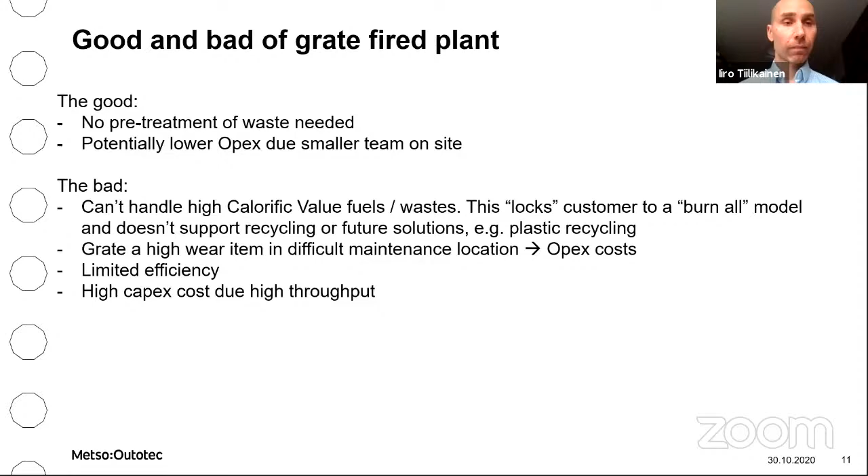Here's some information - we don't sell these anaerobic digestion plants, but I wanted to show how this solution is really taking hold at the EU level. This is already happening heavily in the European Union, that food waste is taken out of the waste stream and put into a separate plant because of the benefits it offers. Of course, when Brazil starts to really enter into waste-to-energy more broadly and starts adapting these technologies from countries where this has been done before, it would make sense to adapt the best practices rather than go the wrong route first and later try to change that.

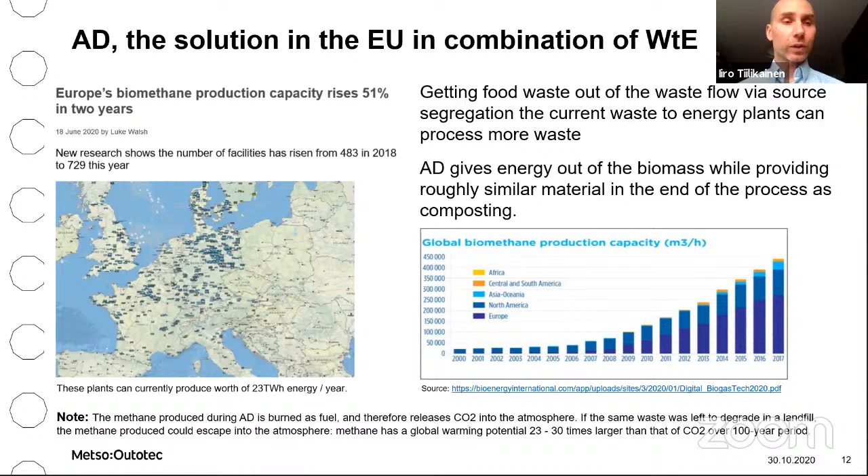I have many slides in this presentation on the benefits of our technology - how it's modular and easy to localize the manufacturing. But I'm conscious of time, and the organizers, the team behind ABREN, have said that everybody will get a copy of the presentation, so I'd like to leave you the opportunity to read through the rest of the material. You'll find my contact details on the last page.

So I'm happy to answer any questions later on, but of course happy to take any questions now if you have them.

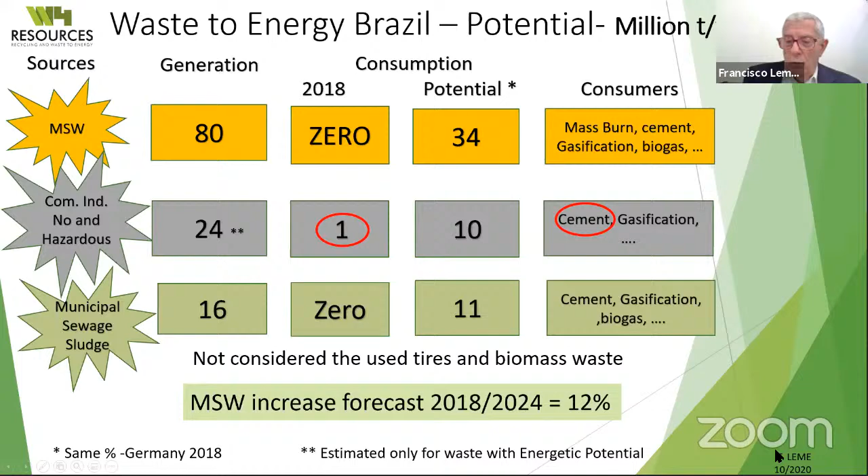Just to finalize my small presentation, the opportunity for Finnish companies to help Brazil change the history of waste here is to go from 1 million to 55 million tons per year through mass burn installations for major areas. We have a large number of major metropolitan areas — of course some are not suited for mass burning but might be better for cement, as Belo Horizonte, which has 5 cement plants nearby, and Curitiba also. Of course, we need plants to produce CDR, combustible derived residues, and to separate the recyclables.

Gasification, biogas plants — logistics is a big issue for waste in Brazil due to our distance and size. We also need plants to generate energy and steam based on waste, biomass and biogas. Of course, we need your know-how. Welcome, Finnish companies, to help Brazil change the destination of its waste.

I want to share a curiosity. Maybe most of you speakers already know about it, but let me share with everyone listening: Brazil is the biggest leader in agribusiness production. I don't know if you already know that the first tractor factory in Brazil was a Finnish company, starting in the 60s with the first farm tractor plant in Brazil, built with Finnish know-how. I'm very proud because it was my father who brought this plant to Brazil. Thanks a lot for the opportunity.